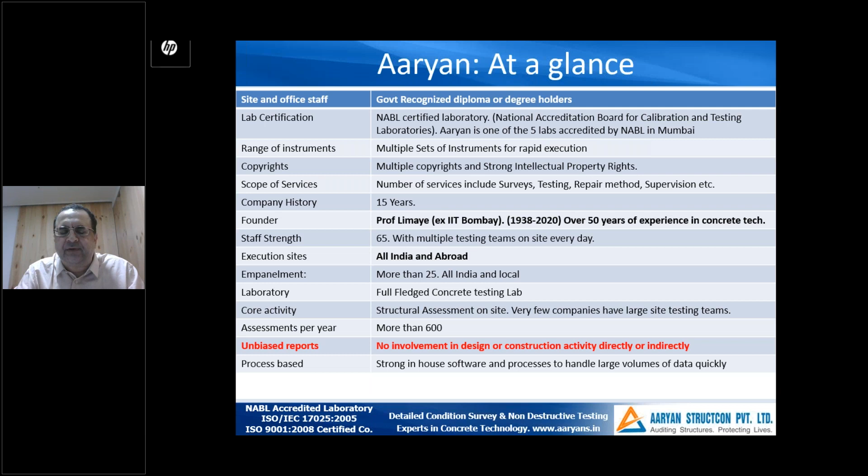So whenever there is a claim which involves structural damage, there is always some pressure from clients, insurance companies, insurance brokers to give a quick report. So there's always some pressure on the time frame.

The second aspect is that surveyors usually do not possess expertise for structural analysis. The third one is that there are very few laboratories for structural testing, on-site tests, which are under NABL. Most of the labs, as I said, are material test labs. Very few companies have large site testing teams, so if a large site has to be assessed, it is difficult for them to do so.

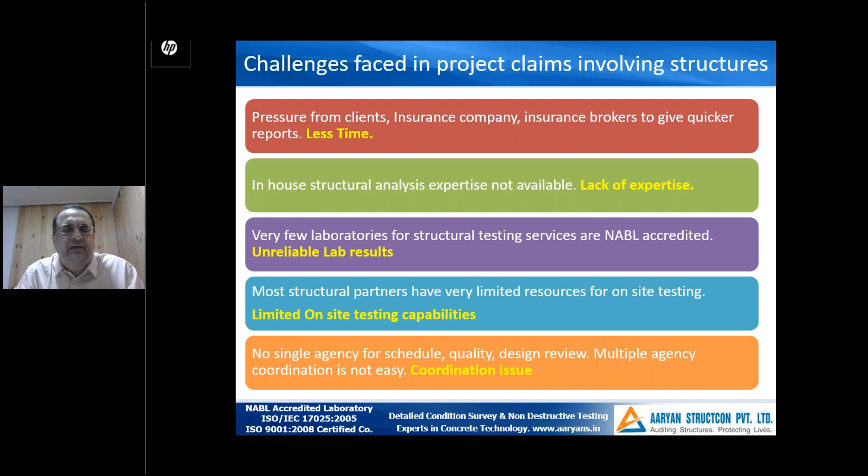Then there are multiple agencies who do quality, design review, schedule review, so coordinating with them is not easy. It results in a coordination issue for the surveyor.

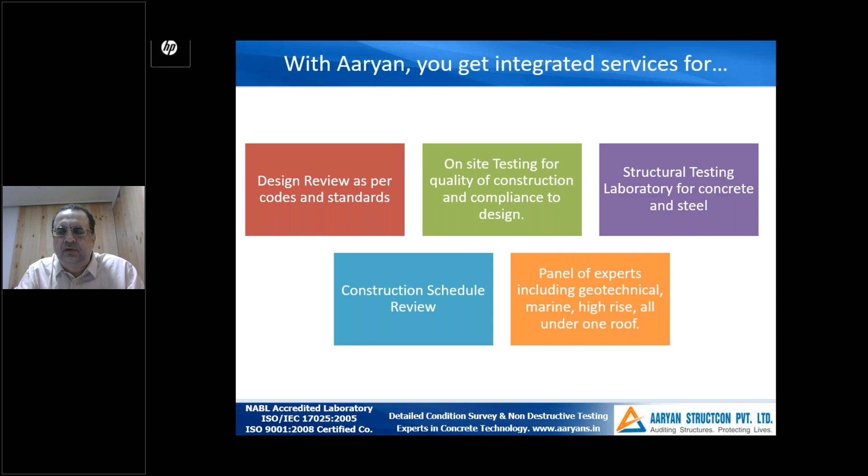So with Aaryan, the surveyors get integrated services. We can review the entire design as per code and standard, if required for that particular claim. We have a large team for on-site testing. We have our own laboratory for concrete and steel tests. We can review the construction schedule in case there is a loss, which is a claim involving usually ALOP. And we have a panel of experts, including geotechnical, marine, high-rise, steel design, all under one roof. So we are a one-stop shop which can give you the entire analysis.

Let us see how we do it.

Typically, what we have experienced is that structures fail either because of fire, which damages some or more parts of the structure, leading to a repair or rehabilitation. There could be a collapse of the structure because of n number of reasons. There could be damage due to flooding, which usually damages the foundations, leading to structural damage.

There are cyclonic winds. For example, there was a cyclone in Chennai which resulted in very high winds, causing damage to a few structures. Then underlying geotechnical reasons could also be a cause of damage, which are usually seen for tunnels, metro, certain foundations, and so on.

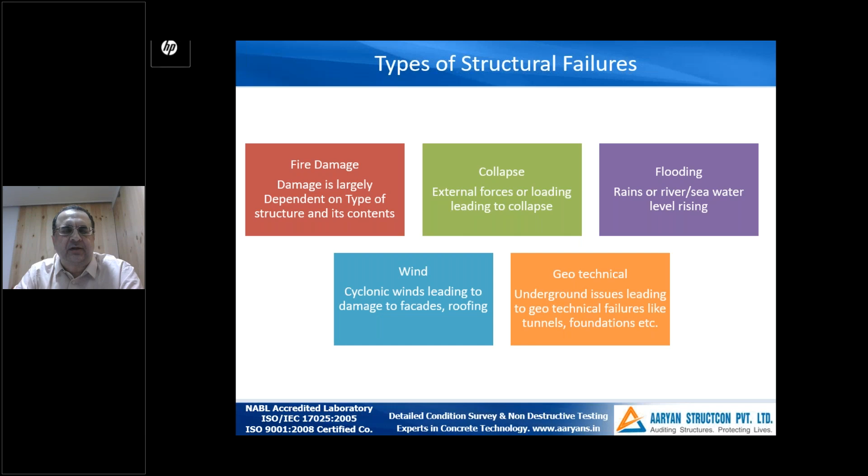So now we will directly go into certain case studies for some select few projects that we have done. We have done a lot more, but I've just selected a few of them so that you can get some idea of what kind of assistance you can get from us.

This was a warehouse in South India. It was claimed that because of the cyclone, the entire warehouse needed to be reconstructed. But with all our tests, we could ascertain that the warehouse had undergone damage because of aging, and furthermore, reconstruction is not required and it can be repaired.

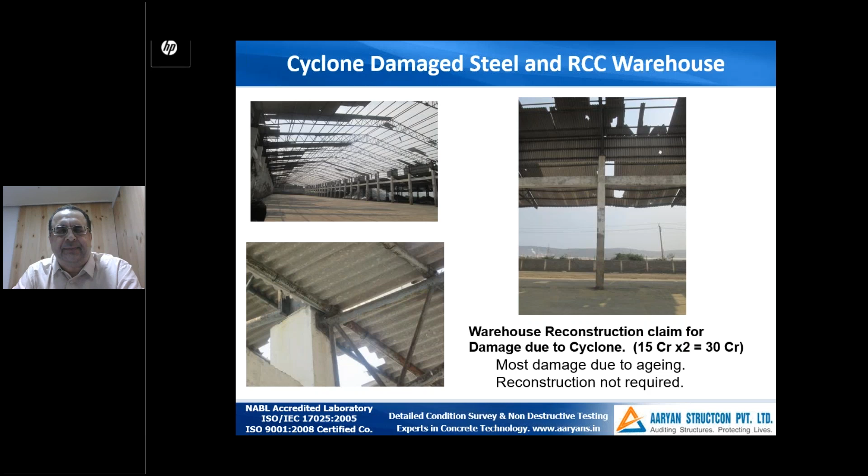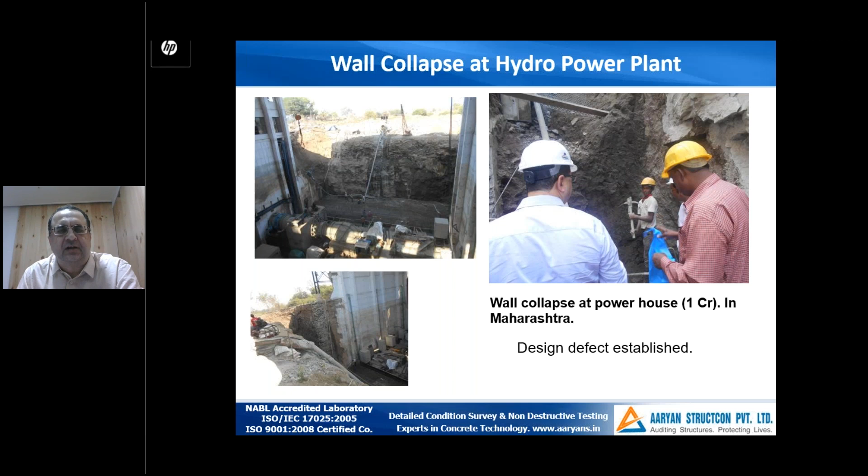Let's look at the next case study now. There was an entire wall of a hydropower plant which collapsed, and this was quite a high wall, I think some 12 or 13 meters high, which completely gave way. So again, our services were hired to find out exactly what the issue was. What we suspected was that the design itself was at fault. So we established that the design itself could not withstand the water pressure of a saturated soil.

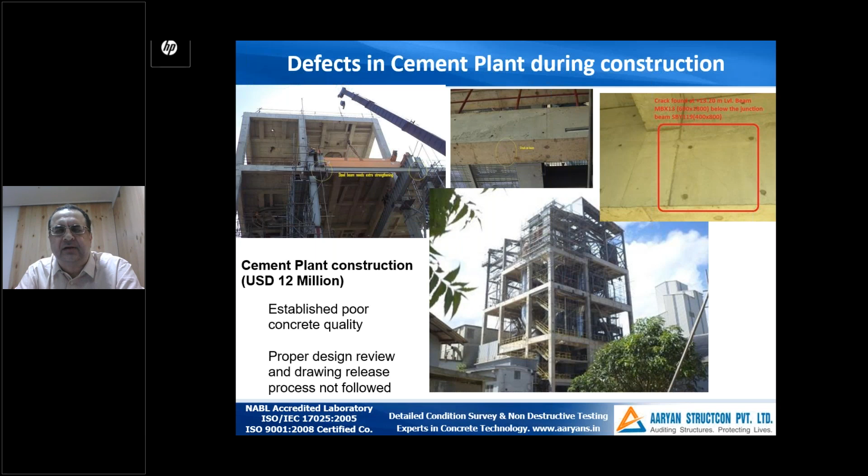For the next claim, we were engaged to find out the defects in a cement plant which were claimed by the client during construction against the contractor. Here we established that the concrete used in construction of the cement plant by the same manufacturer did not meet the required strength criteria. Second, the process used for reviewing the design of the plant as per the proper codes was not followed. So these were the two root causes which were established. Then we had to also check the estimation given to repair and all that. So that was a part of our assignment, which went into 2 or 3 phases and visits.

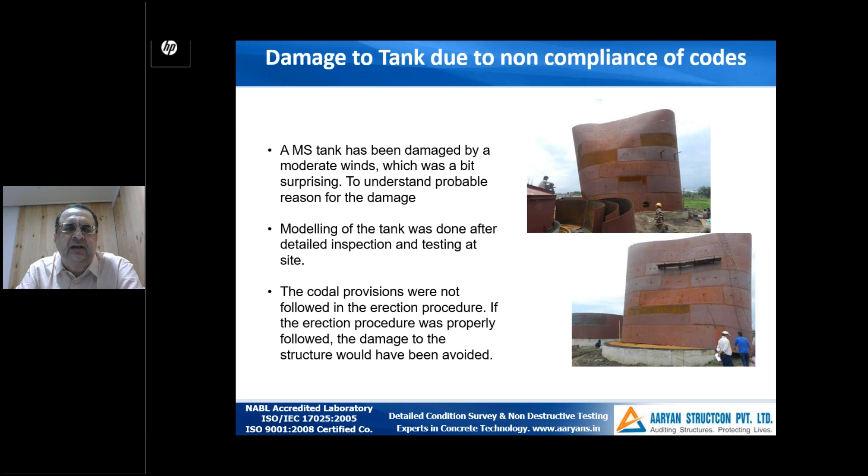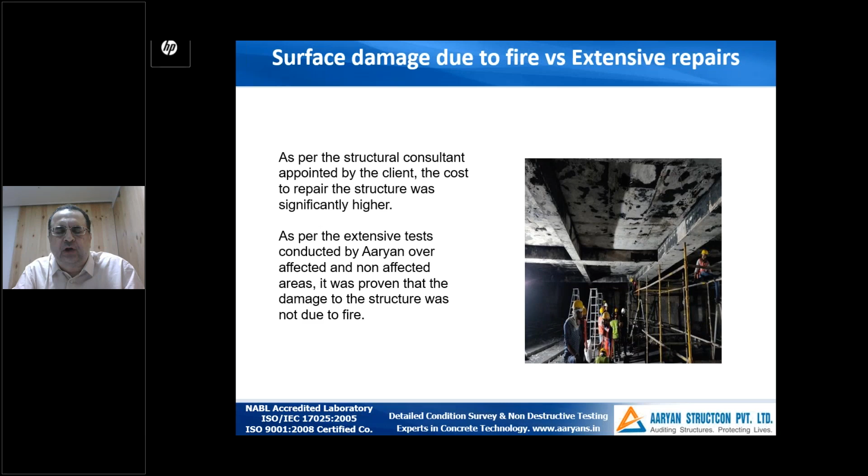There was another interesting incident where extensive repairs were claimed by the client, supported by the civil engineer appointed by the client, saying that such strengthening had to be done. What we did is we tested the affected area of fire and also the unaffected area. With that, it was proven that the damage was not because of the fire, but because the structure had an inherent condition which got exposed due to the fire. Accordingly, the claim got settled later by the surveyors, the company, and the client.

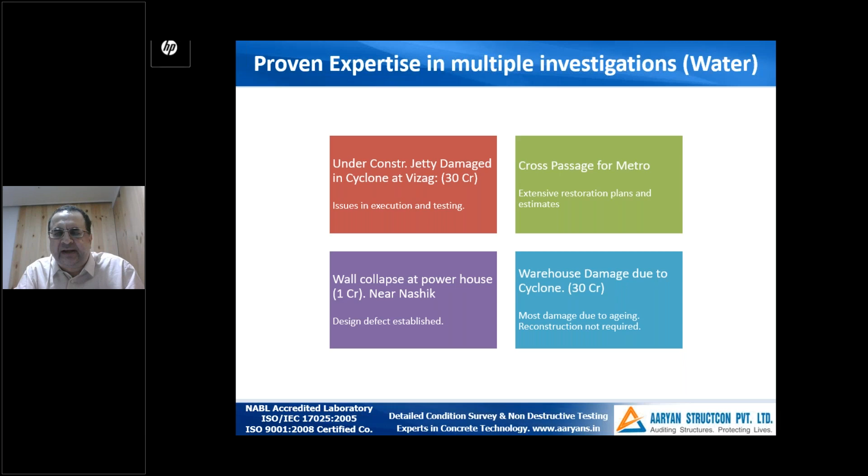So these are some of the projects that we have done at different locations in India. These are related to hydro damage or water damage. These are some of the examples which we have generally seen for industrial tanks, roof collapses.

Then there are certain other defects like cracks in concrete. There was a tilting of an oil storage tank under construction, a girder collapse, and a complete new tower being built for power transmission that collapsed. We had to find that out.

There was another interesting case in Mumbai where a landslide affected a residential building. Somebody had given an opinion that we should demolish and reconstruct. But when we went to the site for the survey, we found the verticality to be intact. So a repair scheme was actually proposed, and at a very nominal cost, the building got repaired instead of reconstruction.

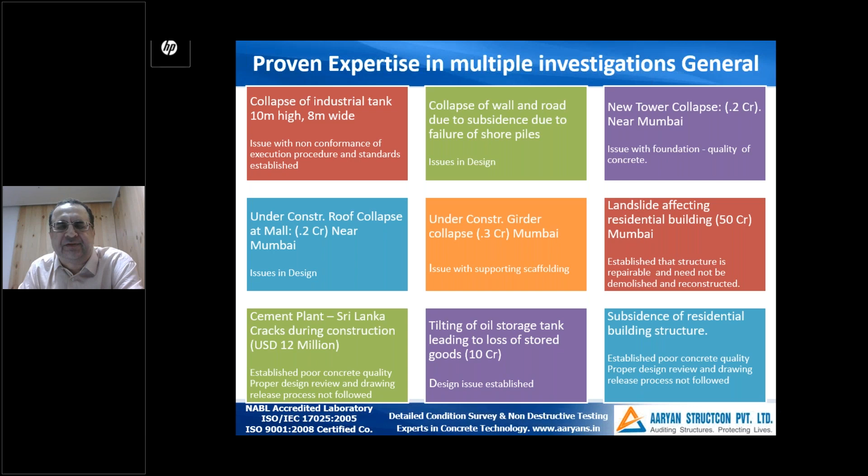These are some of the investigations that we keep doing for fire damaged structures. Here the issue comes: should we reconstruct or should we repair the structure? This is a typical question asked. Sometimes it is complete repair, sometimes partial repair and partial reconstruction, or sometimes complete reconstruction. But the whole thing is defined by a lot of test data and observations by which we are able to prove that whatever estimation or scheme we give will stand any third-party scrutiny.

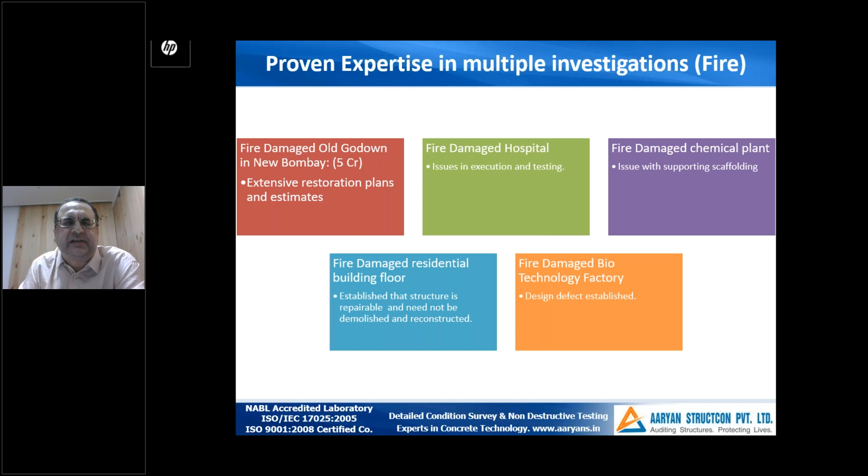Our typical investigation steps are: whenever there's an incident, the surveyor goes to the site and prepares the initial survey report. That gives us some idea of the extent of damage, not complete, just an initial survey report. After that, we do an initial assessment site visit because we need to find out what information is available with the client, what is going to be our scope, and what is the condition of the structure. So the initial assessment is done in detail.

Based on that, we have certain information that we seek. We have some initial meetings with the stakeholders, and some queries for the client. Then a detailed investigation is taken up. Once the scope is ascertained, a draft report is submitted, and after multiple meetings with the stakeholders, a final report is submitted.

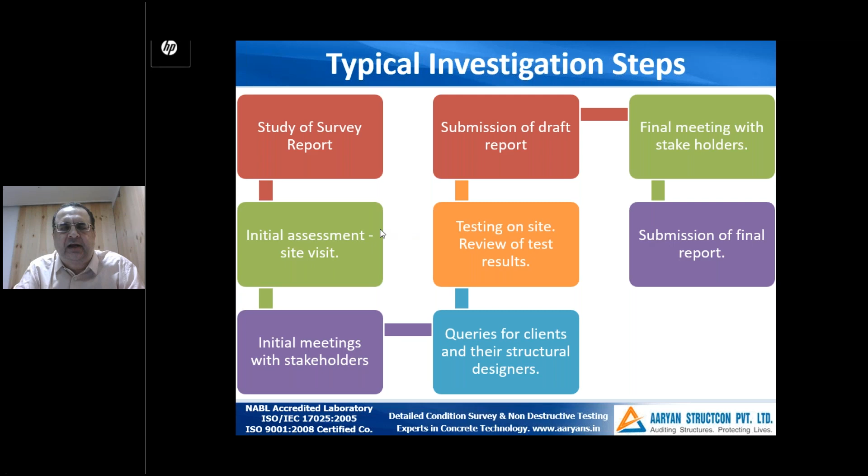Usually there will be a civil engineer appointed by the customer, client, or the insured, and they might have a different view. But our approach is that if the same input is provided and the same process of logic is applied, it should get to the same output or conclusion. That is the logical method we follow. We base everything on data. That is the approach we take.

So the initial information that we require, for example, is the project information: who is the stakeholder, what is the site, where is it, what were the environmental conditions at that time, is there any meteorological data to support what wind speeds have been claimed, any press information that came up during that time, and so on.

So that gives us general information of what happened at the time of incident. Second thing that we require is the initial survey report, initial damage assessment. If it's a fire, then what kind of stock was there? Was it inflammable or not? And what was the weight or volume kept?

Then we go into the design aspect where we check the structural and architectural drawings, any structural calculations available, any design to be checked, any geotechnical investigation report if available, and on what basis the external parameters can exceed the design input.

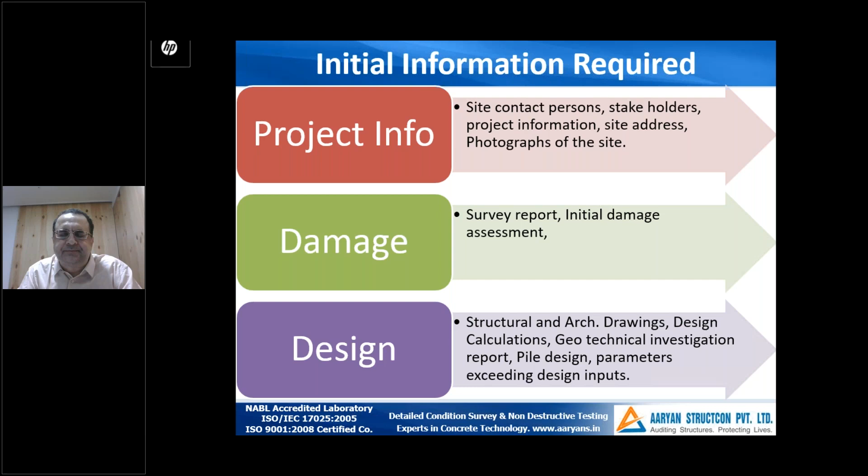Once we have this initial information, then we go in for an extensive design check if required. Now all these things may or may not be required for a particular site, I am just giving you the general method. After that, the parameters affecting the structural behavior are also checked during construction.

If the mishap or accident happened during construction, we also check whether sound construction practices were followed. Then the quality of structural concrete and steel is checked, and the compliance to design is also checked.

The review of other test results is also compared to correlate. We have to ensure that the test results correlate with each other and also do observation so that it creates a holistic picture. We cannot interpret a test result in isolation. For example, a single test result is showing good value, but all others are pointing that the values are poor. So we have to find out whether it is a location-based issue or a specific area which was not affected, and so on. It requires a lot of correlation.

Combining all this information, we go to the root cause analysis. Then we identify why this structural issue has happened - is it because of a structural design problem, execution, and so on, and what is the extent of damage.

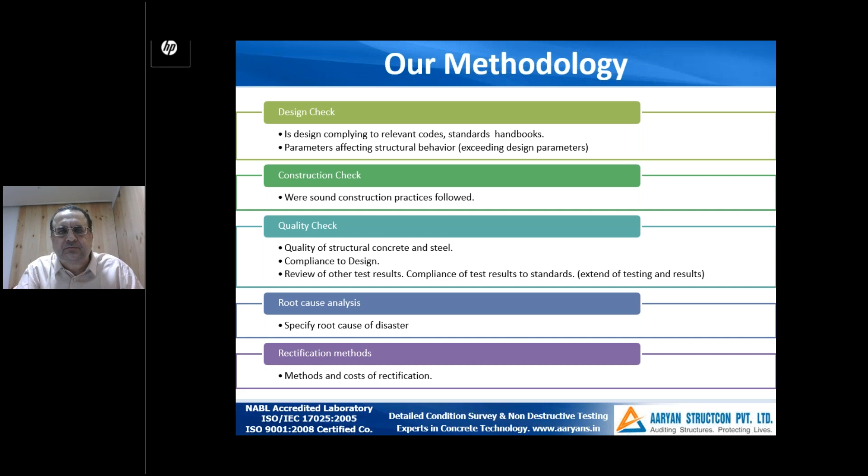So the report that we give has usually got most of these areas, and depending on the site it could slightly change. One is the executive summary of the report - this is the summary along with the conclusion, like our summary letter. Most people read our summary letter, which runs into a few pages, and they're able to understand based on what and how we have concluded.

If they want more information, they can always go to the annexures. Typically the annexures have one section of design where we do the design review, sample calculations if required, and any input we have to check like wind, wave, soil, groundwater level, whatever. If there is a requirement to do the foundation review, that is in another section.

We have also taken bore logs at certain sites. Certain new bores were actually done to find out what was the actual issue with the soil strata, and whether the reason we anticipated was right or wrong. So all those investigations are done.

Then there's a review of the superstructure that we do, which is compliance to design with visual inspection and so on. Then the construction methods are reviewed in detail - the schedule of construction, the SOP and so on. Whether the execution happened in the correct way is established by review of test results of input materials, and if there are any additional tests to be done, those are also taken into account.

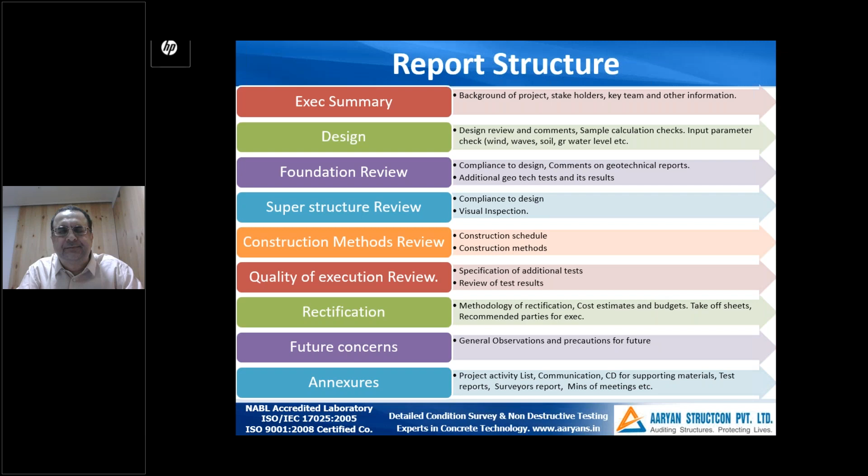So what are the different variations we consider when evaluating any structure? First is the type of structure — is it a building, a shed, a port jetty, a bridge, a tunnel, a high rise, a transmission tower, or a machine foundation? Is it a process plant, or a road that got washed away, or a flyover showing cracks? That's one factor — type of structure. For environment, we classify as onshore, offshore, or marine.

In terms of design, if it's a very critical design like a process plant, it follows a different design process; if it's a simple residential building, it's simple. Then, what type of construction material is used — RCC, steel, masonry, composite, or in certain cases specialty materials, which require special investigations.

The foundation is also analyzed — typically pile foundation, raft, or open foundation. Then we find out the incident type: fire, earthquake, explosion, accidents, floods, cyclone, and so on. What is the age — was it under construction, fairly new, or fairly old? We've seen structures 70-80 years old, and structures that failed during construction. So we see a complete range in our analysis.

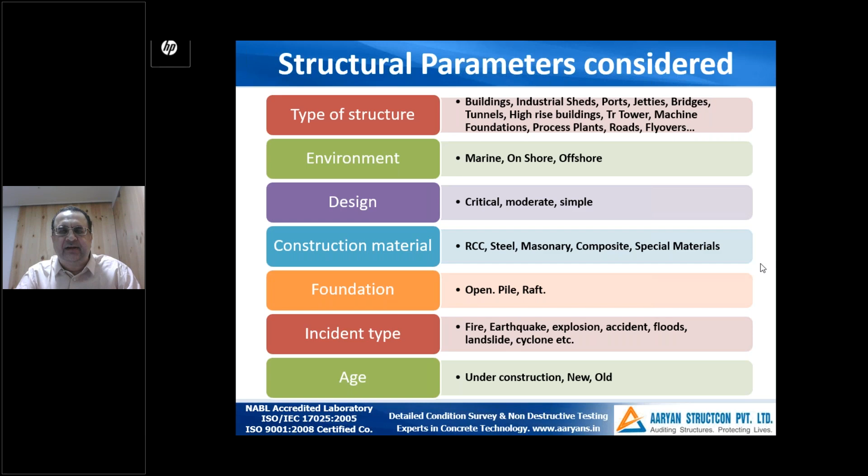Common issues we've noticed are as follows. In design, it's commonly seen that it may not be done for the worst case condition — it's somewhere optimized, with the thinking that 'generally these things don't happen, so let's not account for certain factors.' Then usually external factors are blamed for design shortcomings — this is also what we've seen.

But if the design itself is not as per the code or the code's provisions, it won't be able to withstand any external force, because design normally takes in a 1-in-100-year event. But if it's a 1-in-1,000-year event, it may not be able to take it.

We've also noticed with construction quality that economics takes priority over safety. At times, designs are altered without approvals, and improper shuttering, support systems, or scaffoldings are used.

As far as schedule is concerned, delays could also be because of lack of finance available to execute the project, lack of paperwork to prove material was actually on site during construction, and risks like weather not being factored into the construction.

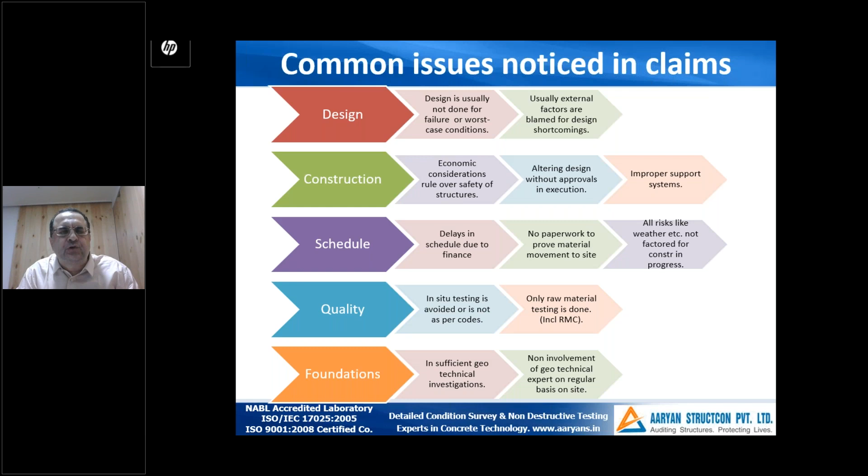For foundations, usually very few boreholes were taken and certain decisions were taken, and non-involvement of geotechnical expert on a regular basis on site. So these are some of the common issues which we have noticed in claims, and these usually get highlighted repeatedly in number of times that we see the structures.

Usually surveyors engage us when the quantification of loss has to be determined for a civil structure. There is a root cause of failure which is not clear. When there are multiple causes, that the structure is old also, and there was a cyclone also, and there was a flooding also, something like that. So then it is not very clear what has caused the maximum damage.

If there is any possibility of litigation which is foreseen for this particular claim, if there is an involvement of structural expert from the client side and you need to have your own expert in order to counter their views, then if the loss or the claim is of a higher value, then you need a second opinion or an expert opinion. Sometimes there are disputes with the client in the settlement amount of the claim, and you need an expert to come in and evaluate objectively.

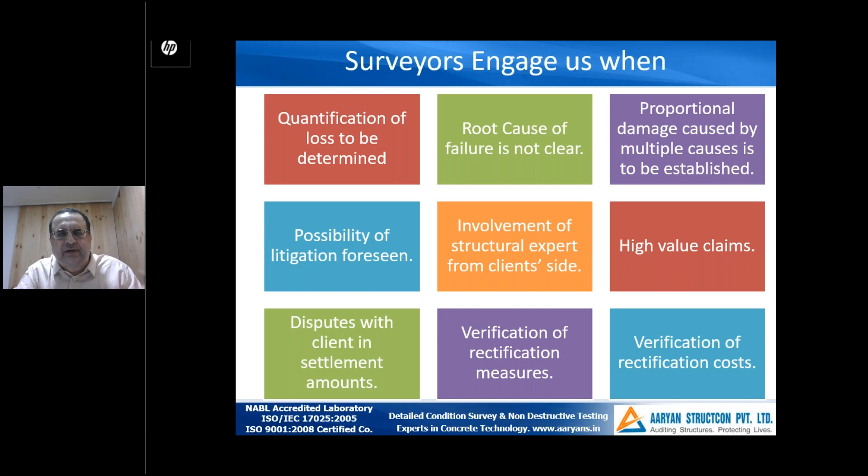Certain times there are repair estimates which are given, which also need to be verified from us, and the repair cost also need to be verified. Now these both are interlinked. If you have a repair measure which is not required, then obviously the repair cost will also be higher. So both go hand in hand. Sometimes we find the rates are higher, sometimes the quantities are higher, sometimes items of repair which are taken are also very high, which are not really required to execute the repair.

So the commercial model that we follow, as I told you earlier, is basically of two types. One is we go for an initial assessment, and then we go for a detailed assessment. Unless we visit the site, we are not able to find out what kind of test and detailed assessment we have to do and what kind of information is available. For example, if you have to do a design review, is the design available, or do we have to reverse engineer the design? These are two entirely different activities.

So with this two-pronged approach, you get an estimate of our services which is right-sized, which is not over your budget, and which is not having anything extra which will not help you to conclude. So once our offer goes to the surveyor, they get an approval from the insurance company, and on approval they give us a go ahead. So our fees are reimbursed by the insurance company to the surveyor who pays us.

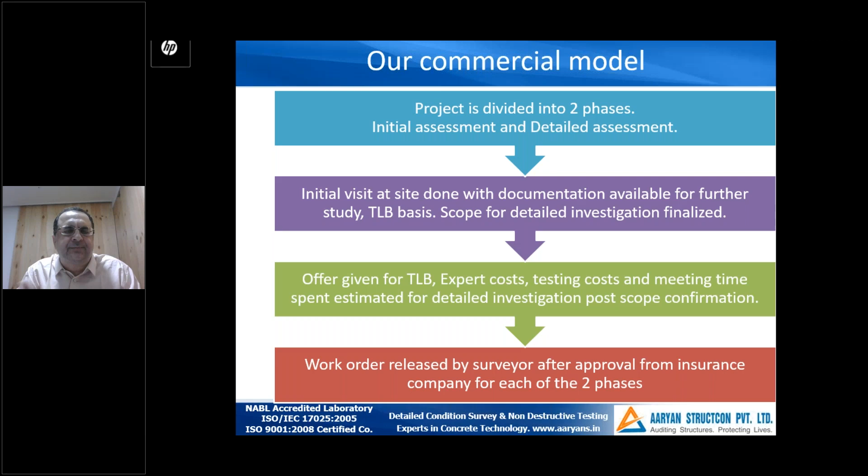So normally these are the four phases that we work in. There's an inquiry which comes with the survey report. Our offer is submitted for the initial estimate, and to find out what is the scope, we have to do an initial estimation for which there is a nominal charge that we put. And then there is a project execution with 3 or 4 phase-wise billing.

Usually it is for the extensive visual observation done at the site, the design review if necessary, testing, and the rectification estimate or reconstruction. Finally, we do a sign-off with the surveyor and the client, and once the technical report is given and accepted, our scope is complete. The settlement of the claim and the salvage value and inclusion, exclusion, and discussion with the client on the actual value, that is all taken care of by the surveyors. We usually don't have a role in that.

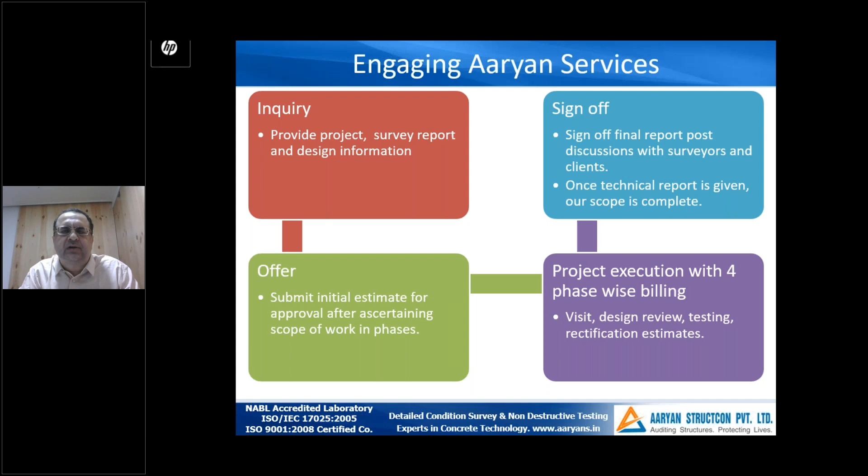So the advantages that Aaryan brings when we work with the surveyors is multifold, because we have no stake in the manufacturing or execution. We don't manufacture any material, we are not into contracting, we rarely do any new design. So we give a complete third-party view of auditing each and every matter.

Second is repair and reconstructions are based on standard rates, which are referenced from either government sources, market sources, and so on. We also factor in where the site is and what could be the impact of the price with some indexing at that local area. If the site is in a very difficult to reach hilly area, then that is also taken into account.

We are able to analyze very complex factors which are segregated and analyzed by us. Our laboratory is NABL accredited, so it can stand any third-party scrutiny. We give detailed takeoff sheets to verify the quantities, so anybody with basic knowledge of geometry or quantification can check the quantities we have taken. If there is any quantity we estimate based on test results, the basis of arriving at that quantity is also explained. So it's a very transparent system.

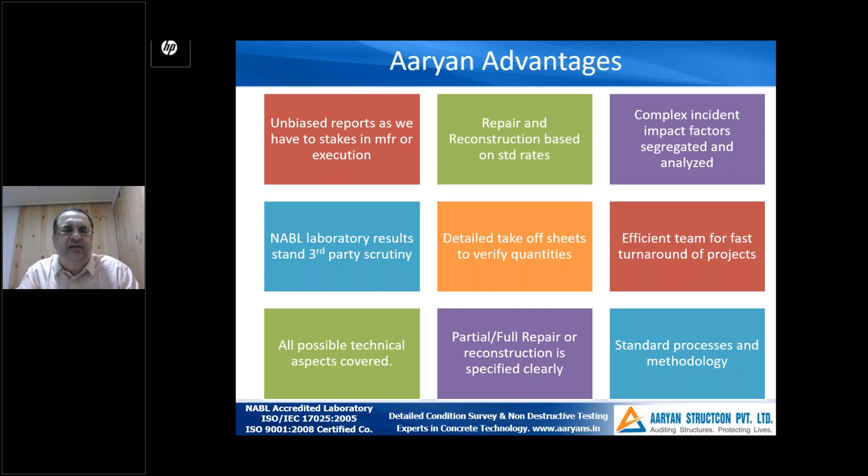Now, if there are any kind of questions that could come, I will be very happy to answer them.